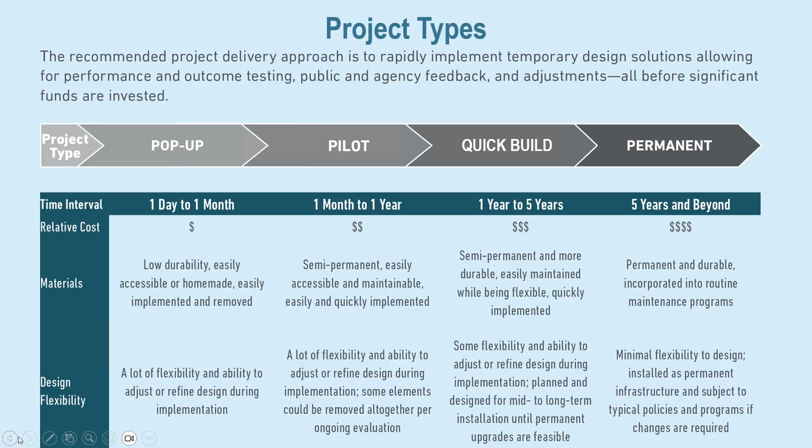Once you have that clear understanding of what the purpose is, then maximize what you have access to. Use the materials that you can easily get. Maybe you have a contractor on board that can do flex posts, or maybe your sign shop can produce some signs. Use what you're familiar with and best for your community. Also engage the community, have them help develop the concepts, think through what you want, what you're trying to achieve and how you should achieve that.

Design for the equipment and maintenance equipment that you already have, and don't try to think of making new maintenance plans or buying new equipment. Test it with the equipment you have and see how that goes. And then we always recommend that you monitor and evaluate it after install, to make sure that you can make revisions or tweaks that you need to before you do that permanent design.

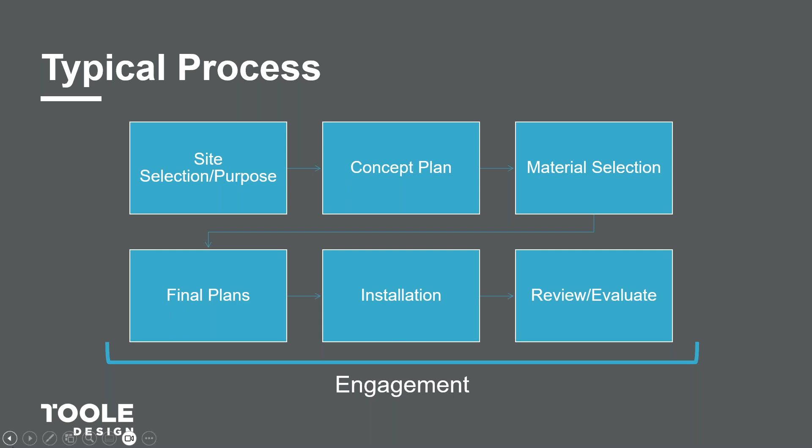So here's kind of a quick site selection of some ideas, if you're thinking about your community right now, and some areas that you may want to do a quick build project. Where are your high crash locations, especially for people walking and biking? Are you trying to build a bike network? Is there a bike facility road that's kind of an easy lift, that you have the space that you can make that marking now? Think about schools, children accessing school. School crossings are a great place to look.

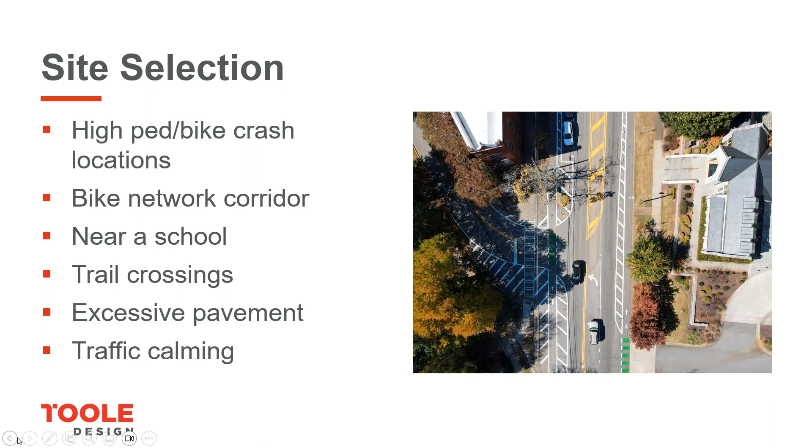So we're going to jump into some of the design considerations. So unfortunately, every project is unique and different. Every site is unique and different. Every intersection is unique and different. So there isn't one solution for all, but make sure that you're thinking about the safety of the users on the roadway, the scale of your project, where is it, making sure that it's still accessible for everyone, regardless of walking, biking, if you're in a wheelchair, using a mobility device, making sure that it's clear and understandable for them. Think through your context where people are trying to go. And then, as I mentioned, the maintenance.

Sorry, there's a little bit of a delay when I try to switch here. I apologize.

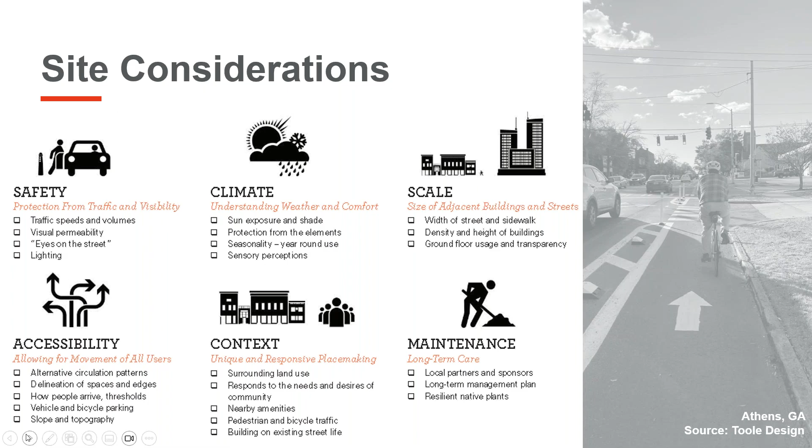Okay. So for design considerations, think about feasibility, what will work best at the site that you've picked, generate that site plan. As I mentioned, engage that fire department, make sure that it works for emergency vehicles. Think through the materials, the durability, the maintenance, and we'll get into some of this in a few slides. And then, as always, your designs still need to be compliant to the Ohio MUTCD, the multimodal guide, thinking through the ADA standards, general roadway standards we still want to adhere to, and we'll talk a little bit more about that in the next few slides as well.

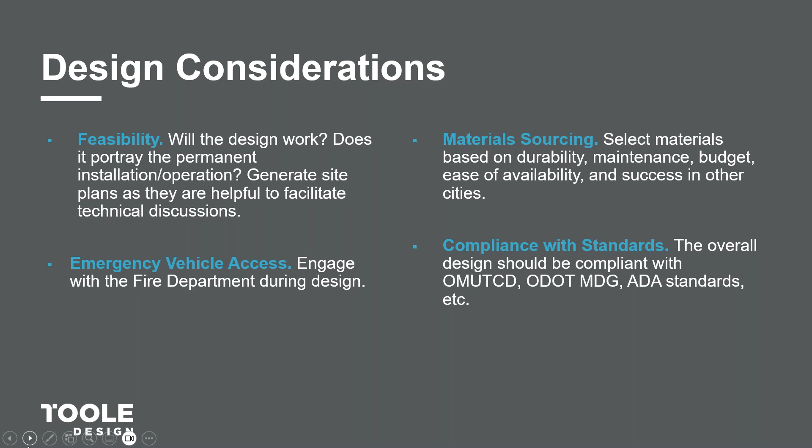So we want to make sure that you're thinking through your site and your existing conditions and making sure that you're solving one problem and not creating another. And so think through how if you have loop detectors, sometimes we shift travel lanes, and so those loop detectors also need to be shifted. Think through your transit, and if you have a bus stop, how will the bus be accessed? And some of those routine, trash routes, accessibility, that type of stuff.

As I mentioned, coordination is key, making sure that you're talking to all your departments, stakeholders, and that's true of all departments, making sure they're aware of what's going on. If you're looking to do a location near a school, engaging that school can be really beneficial to the project as well. We want the community to embrace these treatments, so making sure that they look good, and that's where we don't want them to just look like you put a bunch of Jersey barriers down.

We want to make sure that it's reflective of the community, and that's where those neighborhood associations or business associations can really help bring that aesthetics look, and they really care about that. So that's a great engagement tool that you can work with. And making sure that they're part of the entire process is really beneficial for the community. It helps them kind of understand and be honest at the beginning of what you're doing.

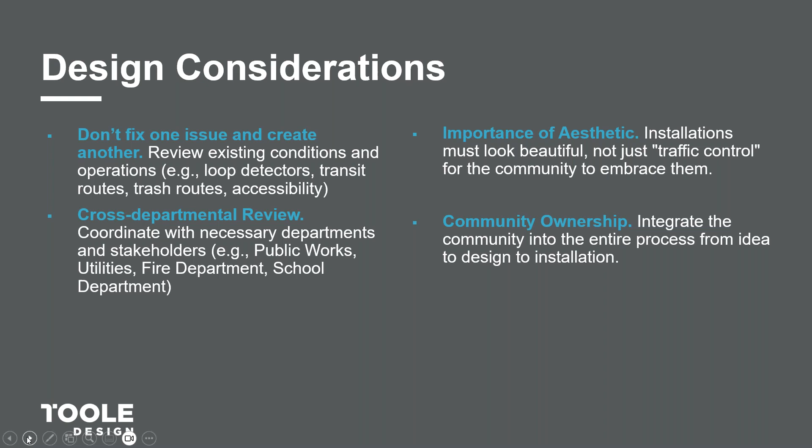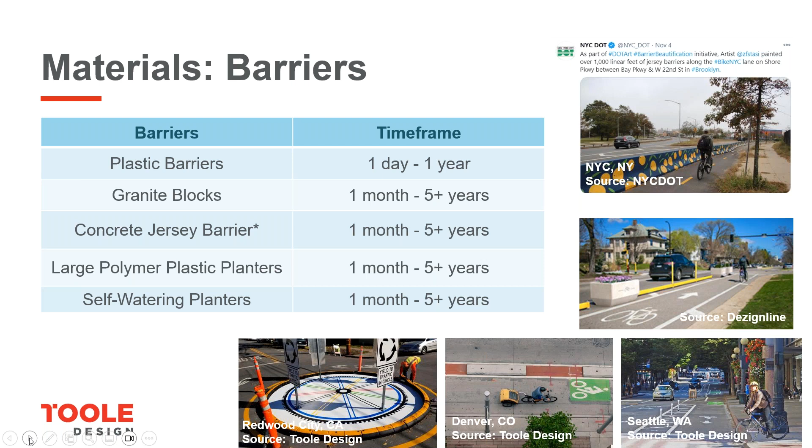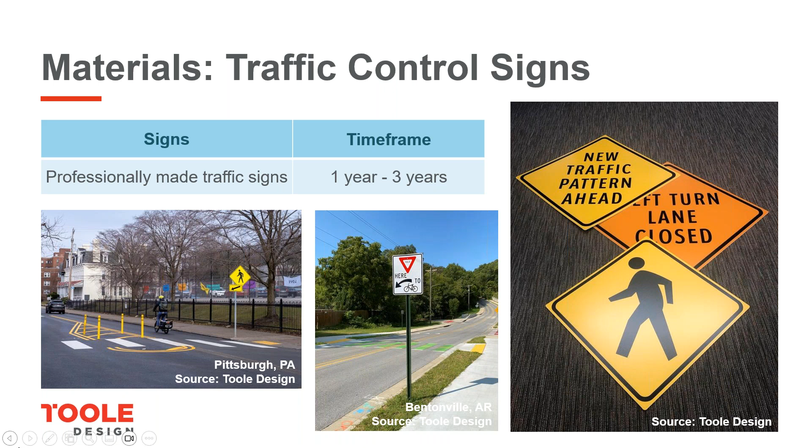We also obviously do a lot of traffic control signs. Signs should adhere to the MUTCD, the Ohio MUTCD. They should be retroreflective and meet all of those standards for the traffic control signs. When we do quick builds, there's a lot of times that we're trying to do informative or educational signs, or trying to get feedback and directing the public if they have any feedback to provide. They can scan that QR code or visit the website.

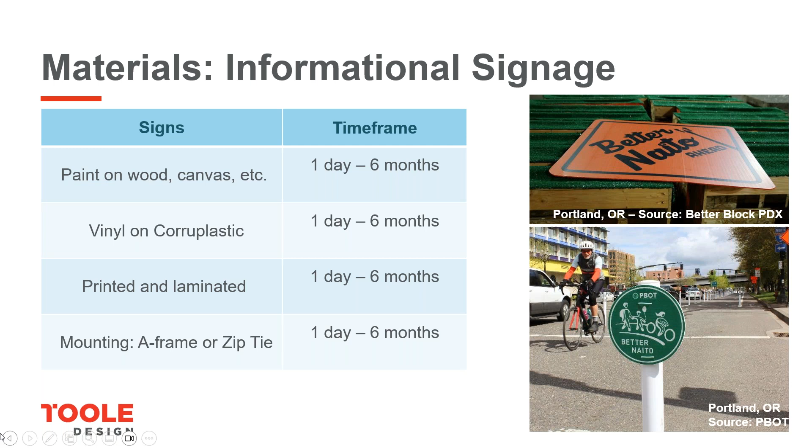And so these signs, you should make sure they don't distract drivers and users of the road, but these can be a little bit more DIY. We've printed them on plastic and zip tied them to posts. So these can be a little bit more laminated and attached to a utility pole or something. So make sure that you're thinking through engagement of people that are using it, and these signs can give you a little bit more flexibility for these projects.

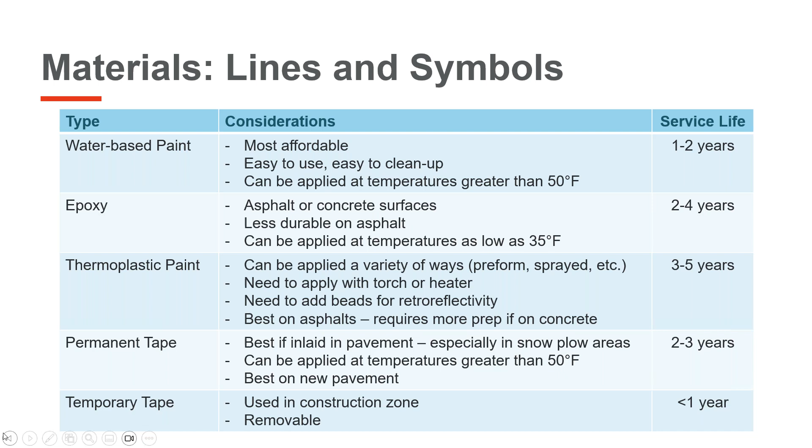For lines and symbols, there's a variety of paint types that you can use, from epoxy to thermoplastic, and they all have different service lives. Depending on the length of your project, you may consider a tape option, but these are a good description of some of those material types that you can come back to if you come back to these slides.

For the striping, just a few tips. It's important that the markings adhere to Ohio's manual, the MUTCD. Even if you're doing a quick build project, edge lines should still be white. Center lines should be yellow. We should make sure that our crosswalks are high visibility so that you're getting the best style, and making sure that they're visible, especially at night. Buffers should still be marked in the right way so that they're deflecting users back into their travel lane. And those are just a few examples about what to think about as you're striping these out.

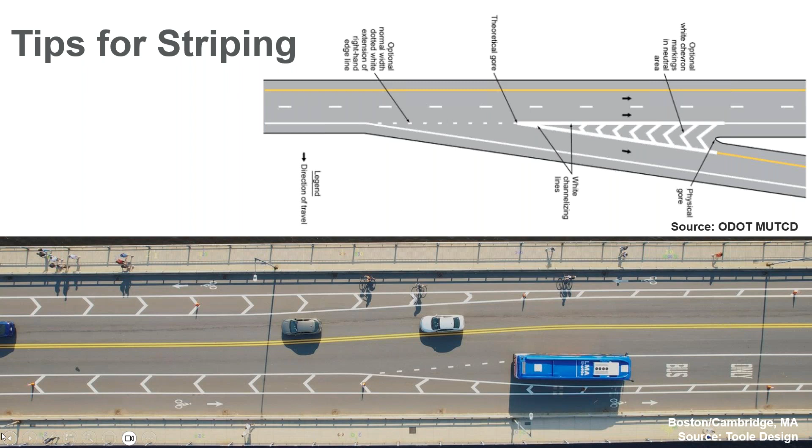Here's just kind of a quick example of some of our toolkit, for lack of a better word. When you're thinking about a quick build project, here's some of the things. We mentioned high crash locations. Well, what can I do?

Think about adding bike facilities, separated bike facilities, narrowing that crossing, adding a crossing island with posts, adding rapid flashing beacons or warning signs. You can narrow intersections. You can add some transit facilities. You could add a floating bus stop or a bus lane. We talked about traffic circles as well as some traffic calming.

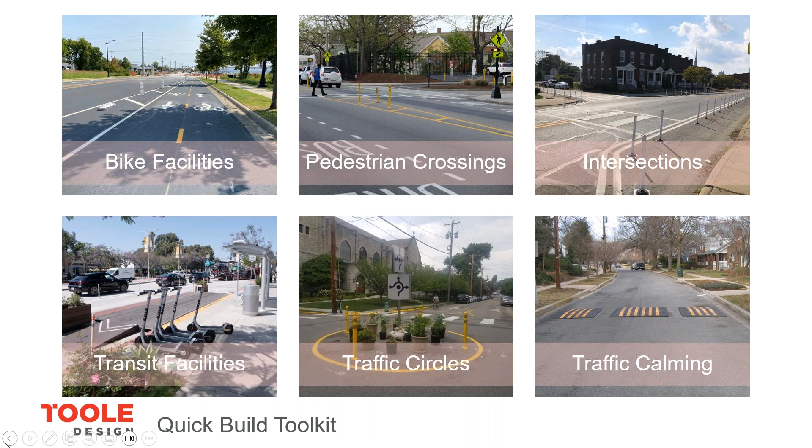I mentioned maintenance considerations, thinking through snow removal and the equipment you have and how much clearance you need between that buffer and that curb, and making sure that you're having those conversations at the start. Also thinking through drainage and your material type, and making sure that material is not impacting the flow of water, making sure that water can still get to where it needs to go, whether that's a drain, a catch basin, or over to a grassed area.

We've mentioned all the different material types and thinking through the durability of those, and how long and how often you need to go out and replace, or if there's plants, who's watering those, so that it does look nice. Making sure that you're thinking through what your staff needs are, so that you're setting yourself up for success.

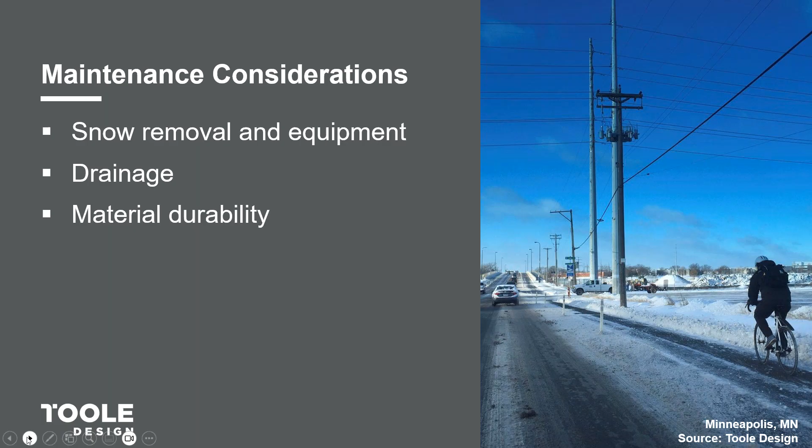The last thing I wanted to talk about was the cost of all of this, and making sure that you're thinking through, if you're buying a bulk of materials, where you can store and keep those until you implement these projects. What are those materials? What are the costs associated to that? Whether you're doing that in-house or hiring a consultant, there could be a cost associated to that.

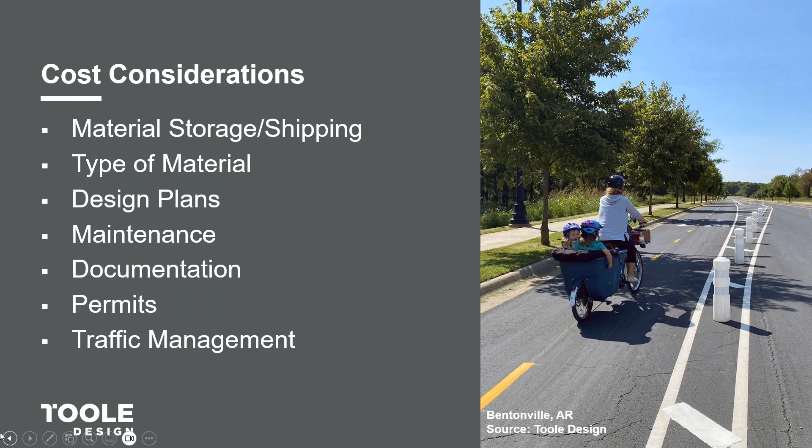We mentioned your staffing levels. And also thinking through, you may need police details when this is getting installed. So thinking through all those little details and making sure that you're aware at the start of what your community is committing to do. So I'm going to pass it off to Mariel now to jump into some of these other parts of the process.

Yeah, thanks, Michelle. As you were talking through that, it was reminding me of a community we were working with recently that actually got big planters from an arborist. The trees that they were getting would come in these big planters, and so they were getting these for free and then painting them and putting in native plants for their community. So I thought I'd share that since I thought it was a great way to use, one man's trash is another man's treasure, and get some free materials and be creative like that.

To reiterate what Michelle said about the signing and striping, sometimes you have volunteers implementing these and they don't have the MUTCD memorized. So I've seen bike lanes with yellow markings and curb extensions with the transverse markings going the wrong way or the wrong color. It may seem really obvious, but depending on who you have out there installing that, they're not always as in touch with those and don't understand sometimes the reasons why we need that consistency in our traffic control devices.

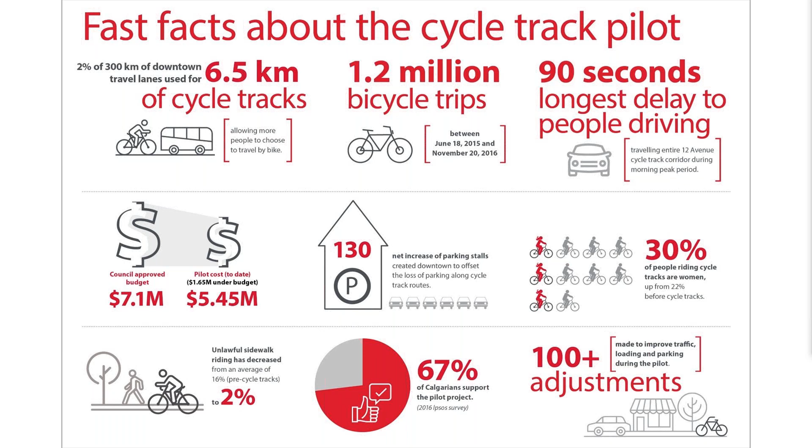Stats are more digestible. So anything you can do to make these more accessible to the community, more relatable, is fantastic. But at the end of the day, tracking the data is the most important thing, and being transparent about what you've collected and what those stats are.

So we do have a couple of case studies to go over with you that are both in Ohio. We wanted to give you some in your own backyard because I think it's always helpful to say, we're doing this in Ohio, it's relatable, it's consistent with other standards and guidance in our state, and you can do it too. So the first one is Mount Vernon Avenue, which is a street in the Bronzeville neighborhood in Columbus.

And the project originally started out as a feasibility study to determine a preferred alternative to address several goals of the community. This area has had some of the highest census tracts of no or one-car households, so very reliant on walking and transit in the area. There's also some crashes that were concerning to the community as well.

So the project goal was to conduct a feasibility study and then do something a little bit shorter, like a demonstration or the pop-up that Michelle described earlier. So really just intended to be in place for a couple of weeks and get some feedback on the preferred alternative, and then implement this project. But the implementation of this was going to take 3 to 5 years to fund, design, and construct.

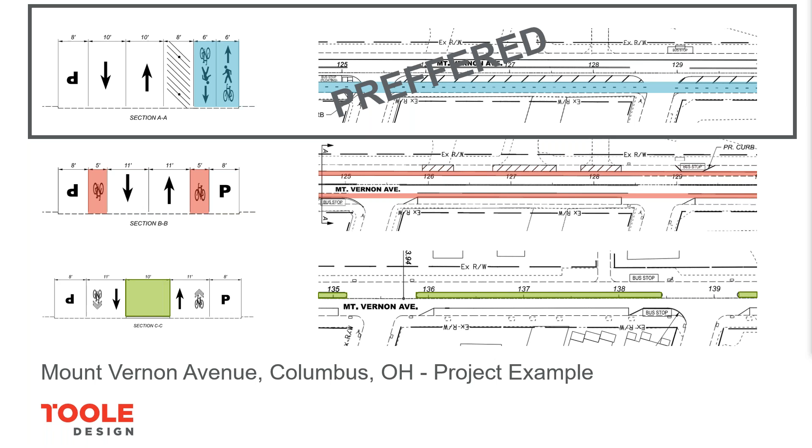And given some of the speeding and safety concerns, the city decided to pivot and instead use that funding they had for the demonstration to do some quick build interventions that aren't necessarily the two-way separated bike lane that was the preferred alternative, but things that would be happening later on anyway, and that could in the short term have an impact on improving safety here.

So the goal of this quick build was to reduce speeding and crashes and enhance some of the neighborhood aesthetics. The feasibility study was over a year, but really once the decision was made to do this quick build, it took about 3 months to draw up some plans and get it installed. So very rapid time frame.

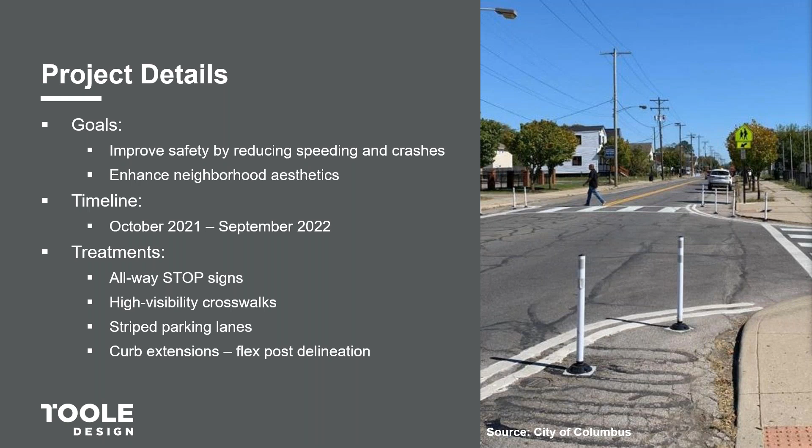So people were having their mirrors whacked and not wanting to park on the street, which then also means it's easier to speed as well. So adding in the curb extensions helped to narrow the roadway, and also those parking lanes as well.

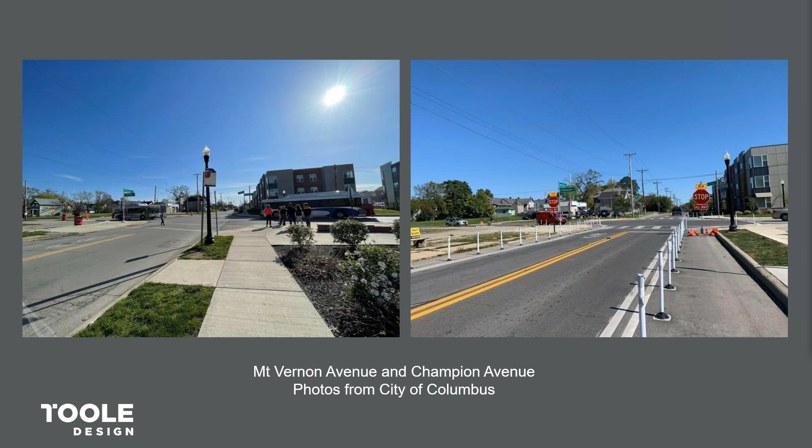And then this was an intersection that was of particular concern. There was a signal here, and when it was removed, it was changed to a two-way stop control. And then there were a lot of near misses. When we did a site visit, there was a ton of debris around the intersection, so we could tell that there were a lot of property damage crashes.

There were sight distance issues, so we were seeing people creep really far into the intersection to try to see, to make a decision if they could turn. And this was a really big concern for the public. The school's not that far away. And again, we have a lot of people walking and accessing transit. There's 2 transit stops at this intersection. So this really just could not wait 3 to 5 years due to the safety risk.

And they were able to go ahead and install this project. We were the designers for this. We put together signing and marking sheets, and their maintenance crews actually installed this project. And they had a lot of these materials on hand that they were able to use to get this built.

And you can even see they didn't want to drive the stop signs into the existing pavement, especially knowing that this is going to eventually change to that 2-way separated bike lane. So they've got some temporary ways of showing their traffic control that are working to show that updated traffic control.

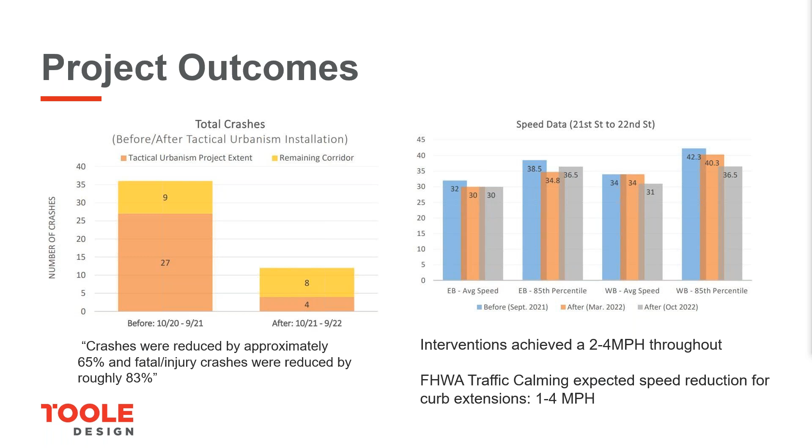So definitely the interventions were effective, but as you can see, the 85th percentile speeds are still high. And that's the beauty of the quick build. We started with these couple of interventions and can understand how well they're performing. And sometimes we have to go back in and layer some additional treatments once we see what these ones were able to do.

The second case study we have is Clifton Ave in Cincinnati. And this was a really wide street, about 70 feet. It did have 20,000 vehicles per day. And this project was kicked off as a neighborhood effort. So there's a local neighborhood group, Clifton Town Meeting, that envisioned having a bikeway along this. And they brought together a lot of different stakeholders to make this happen, and got funding from Devou Good Foundation.

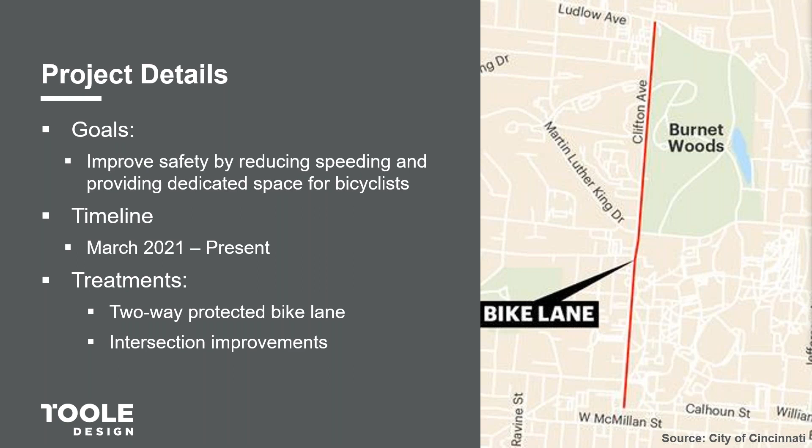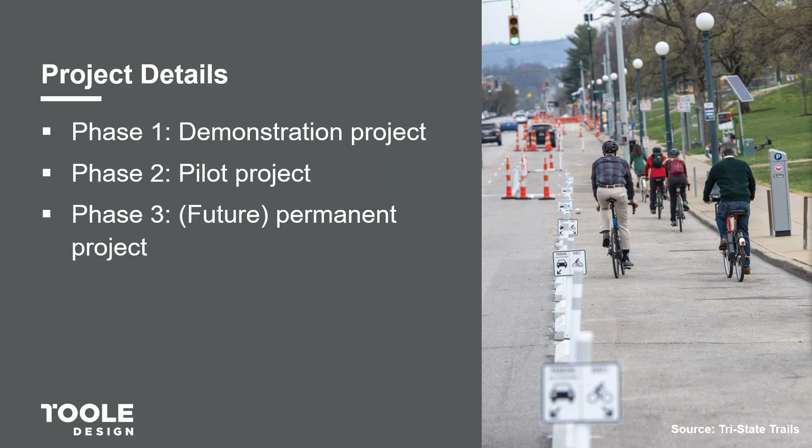And they determined that for this roadway, a two-way bike lane was feasible due to the street characteristics. Before they implemented it, there were 2 northbound travel lanes, 2 southbound travel lanes, and then parking along the sides, and they reallocated one of the northbound travel lanes to add that bikeway. So this was their process. Started out with a demonstration project, then piloted it, and now they're thinking about that permanent project installation later on.

Some of the challenges were they did need to make some design exceptions. With the nature of the quick builds, they weren't able to implement every one of their preferred design treatments for the intersections. In some cases, it maybe wasn't as intuitive as they would have liked, but that's sometimes how we have to implement these: what will work, how can we educate, knowing that we're going to address these later on.

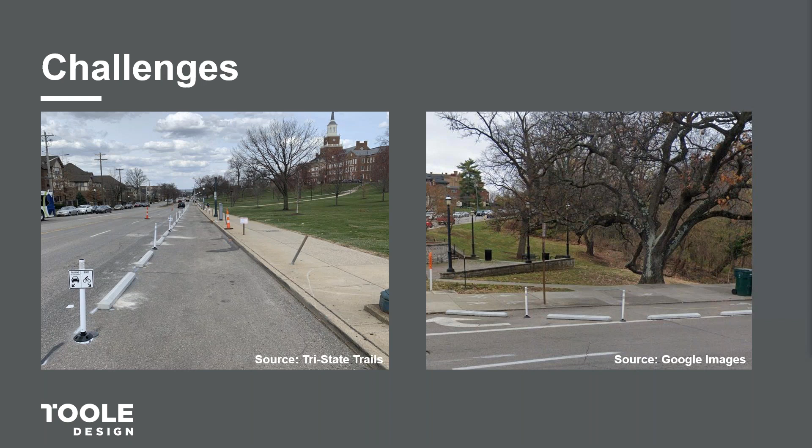So there was also some building construction happening that they had to coordinate with to make sure that there was still access for those construction vehicles, but also making sure cyclists were safe. And really, that's a story we all are familiar with. Our cities are ever evolving. There's always construction. So knowing what the plan is if we do need to close a lane or shift the bicyclist in future conditions as well was something that they ran into quickly on this project and had to think about.

As far as project outcomes, the phased approach did allow for some more incremental evaluation and minor tweaks between some of their phases. Police observed that there were some visibility and sight distance issues at a couple of intersections, so they removed an additional parking spot as well.

Before the paths were in place, 55% of the cars would speed, sometimes up to 73 miles per hour in a 35 mile per hour zone. And afterwards, the number of speeders has reduced to 29% of cars. So big reduction there. The volume of motorists driving faster than 40 miles per hour, which is 5 miles per hour over the speed limit, fell by 43% after the protected bike lanes were installed.

And a quote I have from one of the people involved in the project is, "The success of Clifton Avenue then in turn resulted in improvements to Central Parkway, the city's other existing protected bike lane on Mill Creek Road. New high visibility pylons were installed and concrete parking blocks followed to increase the safety and prevent illegal parking in the bike lane." So lots of positive outcomes of this project, and the ability to learn through this process on how to continue evolving and bring this to other parts of the city as well.

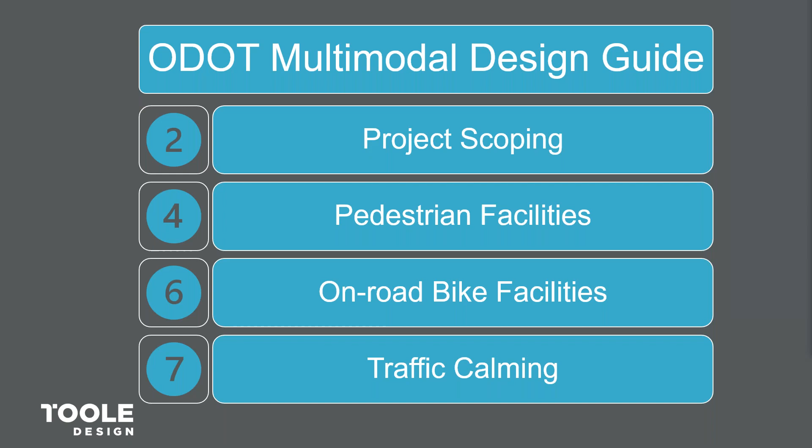Hopefully you have a plan with prioritization that can help you focus on what projects should be considered for quick builds. But if you don't have a plan, or if it's out of date, the Multimodal Design Guide can help you determine if and what types of infrastructure you need. And the best way to get anything accomplished is to think about upcoming resurfacing projects or any way where you can combine costs. So if you do have anything like that, where you'd be restriping anyway, that can be an opportunity to think about what other striping and flex post materials can I wrap into that and accomplish some of these types of projects as well.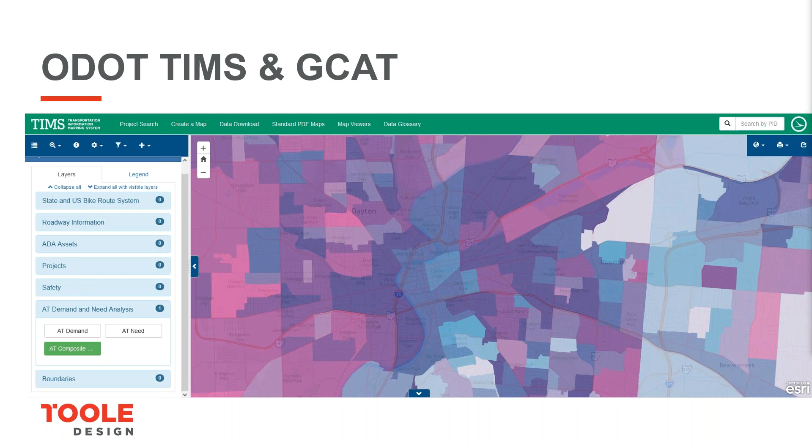ODOT has a really rich data set through its Transportation Information Mapping System, or TIMS, also its crash analysis tool called GCAT. There's webinars, 1-hour long trainings on how to use these, but this is a screenshot of the active transportation map viewer that has great information in it. I've highlighted the active transportation demand and need assessment. So this can be a tool that could help you prioritize where projects should be implemented first, or where, if you have a long-term plan that's going to take a while to accomplish, looking at a quick build project in the interim is really key to do.

As far as funding, Safe Routes to School, their non-infrastructure funding actually allows for planning and development of events or materials that promote walking and biking. So it could be used for some of that education and outreach. It also can be used for materials and staff time for quick build projects, lasting in that 1 to 3 years. So this is a funding source that is available to you.

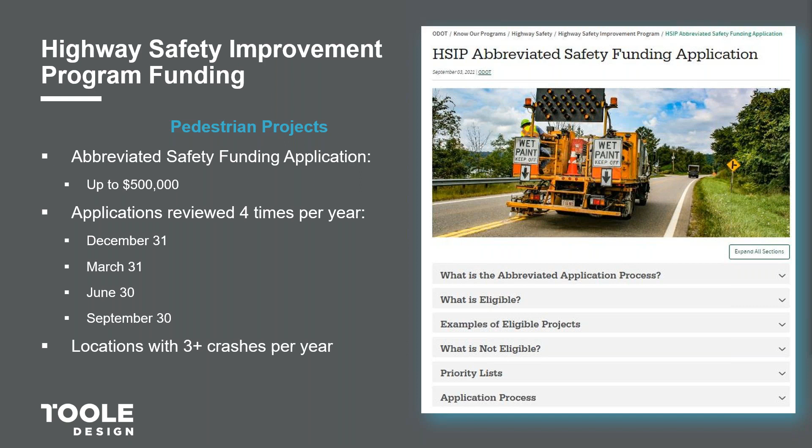And then the HSIP abbreviated application is for non-complex, simple projects. And priority will be given to projects with a high injury severity and also given to pedestrian safety improvements. So that may be one to think about. The caveat is that you do need a project sponsor for the design and funding of this if you're going to apply for this type of funding.

And then another resource is ODOT state purchasing contracts. So this is support for cost estimation and implementation, and you do have to become a member, but it is free to become a member. They have guidance on how you can pass an ordinance and complete enrollment to use these contracts. There's no fee for that. And this gives you access to contracts that can help you better procure contracts, and then also when we buy in bulk, we get better prices. So this is giving you a way to access some materials and implementation in a more cost-effective way.

And if you're curious about this, this is on ODOT's website. There's a contact I would encourage you to reach out to. You can also see all the contracts that are available.

So some that will be of interest to you are ones including flex post, pavement markings, RRFBs, signing. You can also see what other cities are members of this. So if you see a city that you work with frequently, or maybe you have a contact at, you could reach out and say, have you used this? What's it been like? So I always like using my network to learn from others what their experience has been. So all of that information is available on the website for you.